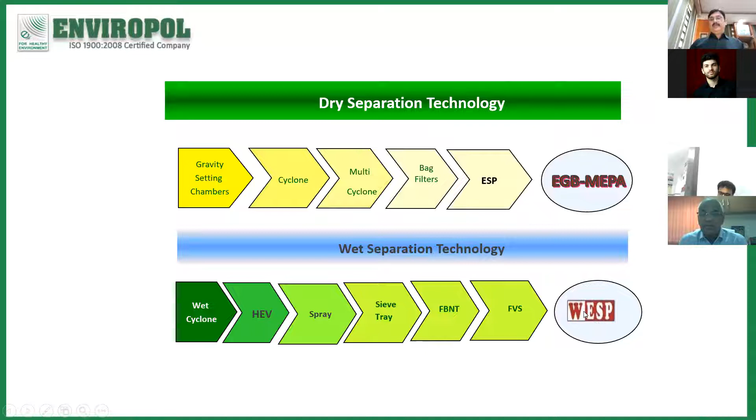Now, as you know, ESP, bag filter, and wet scrubbers are the most common technologies available in the industry. Every industry will have a different kind of setup - some industries are dominated with ESPs, some with bag filters or wet scrubbers, or it's a mix of either one.

So presently, if you look at on an average basis, you find that ESPs are delivering to the tune of 80 to 150 milligram, the current old ESPs, with 2 to 4 fields in configuration, either 2, 3, or 4 electric fields. Whereas bag filters are operated on an average from 50 to 80 milligram with an air to cloth ratio of 0.5 to 2.

It depends on the type of dust. If the dust emissions are very high in quantity and very fine, as well as very sticky, then the ACR of 0.5 to 0.6 is taken, like normally in EFB fired boiler or spent wash fired incineration.

Or for normal cases of coal, it goes from 1.2 to 1.5 or up to 2, depending on the efficiency requirements. The wet scrubber is the most versatile equipment available in industries, and it can be operated easily at 100 to 150 with the older designs. Though new designs are available which can give you even below 50 milligram, but normally 100 to 150 is common for these three types of wet scrubbers in the industry.

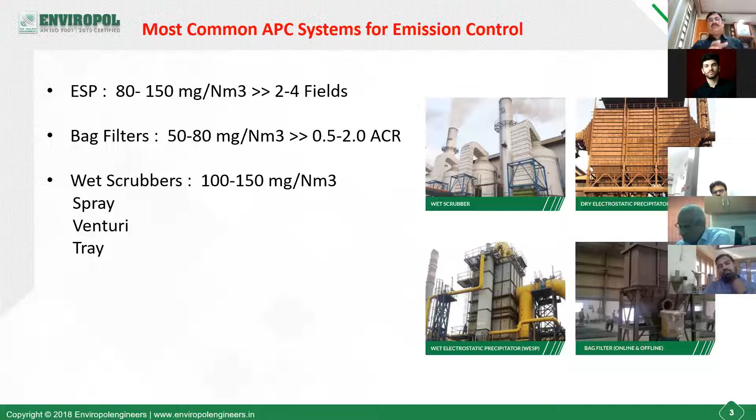So having known these three prevailing technologies, the most common technology in the industry, and knowing their limitations and the present operating conditions varying from 50 to 150 milligram, correct?

Now, if we look at the norms, which are getting more and more stringent, you find that earlier the norms were 150, and now 150 is reduced to 50, and for new plants, it is going down to 30. That means with the existing system in place, we either need a further reduction of 67% coming down from 150 to 50, or 80% for the new plant coming down from 150 to 30.

So the efficiency of the equipment has to go up by the equal amount. It has to go up by either 67% or 80% for most of the plants.

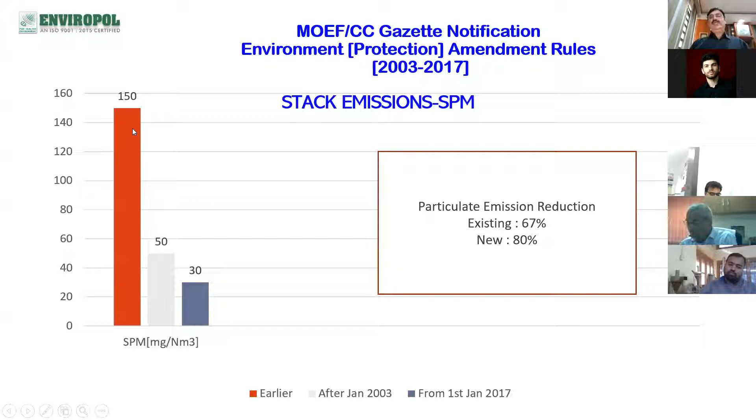The 50 milligram limit is after January 2003, and for new plants, it has already come down to 30 milligram. So the 30 milligram units, if being operated at 150 or designed at 150, you need to enhance the efficiency by almost 80% plus from the existing limits.

So what are the different configurations available for upgradation? Today's webinar is going to equip you with the conceptual ideas of how to upgrade your existing equipment. Then depending on the site to site, project to project, or equipment to equipment specifics, the fine tuning can be done.

But if you look at the concept, the most common way of upgrading an existing ESP is just to add another field. If your ESP has 2 fields, you add 1 field or maybe 2 more fields, and try to upgrade the efficiency of the existing ESP in an industry. This is a very normal and conventional way of upgrading the equipment.

Another way of upgrading the equipment to reduce emissions: the first methodology can bring you down to below 50. Coming down below 30 would be difficult with this configuration if your particle size distribution constitutes more than 10% of particles below 5 micron. Then even if you add 3 or 4 fields, nothing is going to happen if the constituents are below 5 microns, because ESP has got a limitation in arresting particles below 5 micron in the dry electrostatic precipitator.

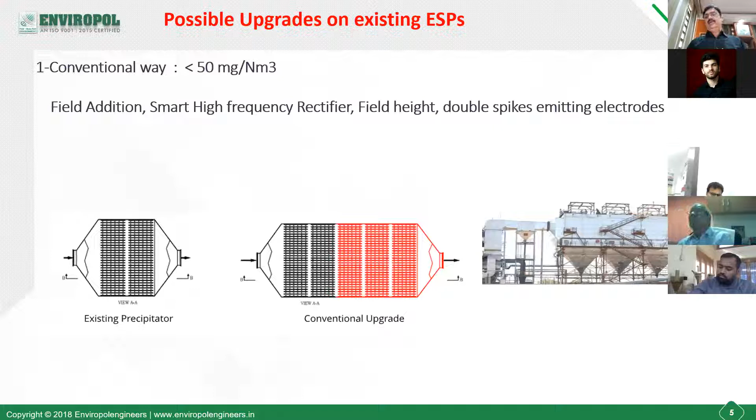So if you want to come down to 30 milligram, then another alternative for upgradation is to make it hybrid. That means the last 1 or 2 fields of the ESP can be converted into a bag filter, fabric bag filter. So this is another arrangement which can work, but it comes with a caution. The caution is that this should not be considered for those types of ash which have a high sticky, hygroscopic nature of dust.

Because what happens after the ESP, you are left with particles which are below 10 microns, and most of the particles are below 5 microns. So when the bag filter is operated only with fines, there is a cake formation on the bag filter which is too difficult to dislodge by purging air. If it is mixed with heavier particles along with fines, then the cake removal is easier. So such hybrid configurations do not give proper results if the gas particles are very sticky and hygroscopic, containing a lot of alkalis.

So this is a caution when you think of upgrading your existing ESP with this model.

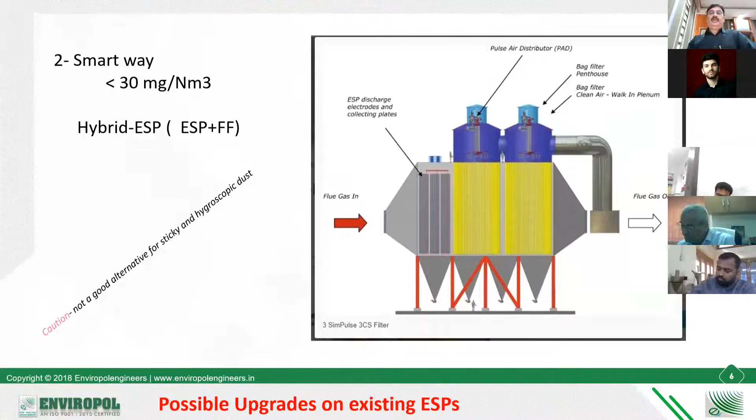The most advanced and innovative way, what we call the most innovative way of upgrading your ESP, is putting up the EGB at the outlet. You have a 2-field ESP attached with an EGB. EGB is an electrified gravel bed precipitator. Since this is a new concept for the Indian market, I'll take some time to explain it. The most effective way of upgrading an ESP is to convert it into a MEPA, which is an integration of ESP with EGB.

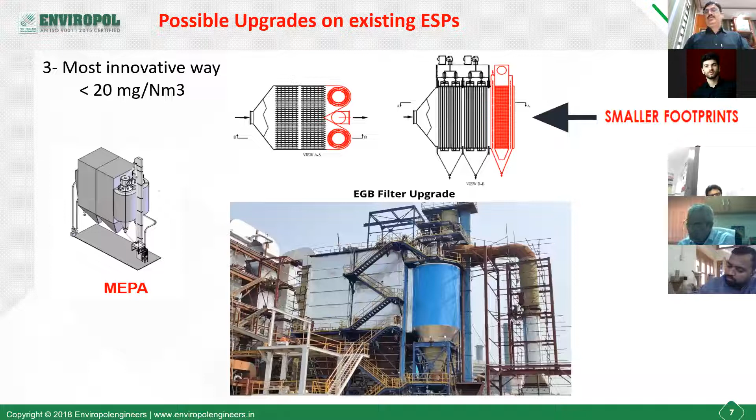EGB is also a type of ESP, but it works on the reverse principle of ESP. It is a dry system. Here the gravels are used as the collecting plate or collecting surface area. This is most suitable for high resistivity dust which cannot pass current. They use only voltage for getting polarized. So this is the concept of EGB.

In the EGB, there is a vessel, and that vessel consists of a gravel bed. The gravel is a normal gravel, pea gravel, which you find across rivers. This gravel bed has a high thickness, to the tune of 300 to 500 mm. The gravel size varies depending on the efficiency requirement, from 3 mm to 8 mm, 10 mm. And the gravel bed is embedded with discharge electrodes, which are given a high voltage to the tune of 15 kV to 30 kV.

So what happens is, when high voltage is given to the gravel bed, being a non-conductor of electricity, it cannot pass any current, but it gets polarized. It gets a static charge; half the gravel gets positive and half gets negative. It is a balanced charge. And these gravels are moving from top to bottom at a very, very slow speed.

When the gas carrying negative charge from the ESP, particles below 5 micron or below 10 micron, pass through this gravel bed, they stick to the positive side of the gravel and get separated. Clean gas goes upward to the chimney, and these gravels are taken out.

This is how the gravel bed is maintained, and it is slipping down to the bottom slowly and gradually. You can see this video - it's coming down at a very, very slow speed, and gas is passing through this.

So there are two types of separation: one is the mechanical separation because of the gravel bed, and the second is electrostatic separation because of the gravels getting polarized and having a positive charge.

If you look at the efficiency curve, you find that even for particles below 2 microns, when the electricity is on, you have an efficiency of 100%. Up to 2 micron you have an efficiency of 90% without electricity; when the electricity is on, you touch 100%. Even at smaller particle sizes, you have a very high efficiency - at 1 micron, you have an efficiency of almost 99%.

So this is a very good fit for ESP upgradation, whenever you are looking to increase the efficiency of the ESP and reduce emissions to well below 30 milligrams. This could act as a very good polishing filter for removal of very fine dust left by the ESP.

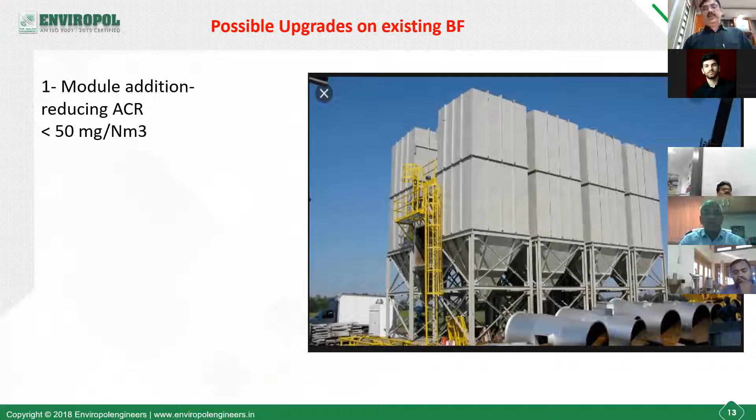What are the smarter ways of doing it? Another way is changing the type of bag. If you have normal bags, you change them to PTFE or other types of bags which have low porosity and better filtration. So the other methodology is changing the bag while keeping the same housing, but using a better bag with more efficiency.

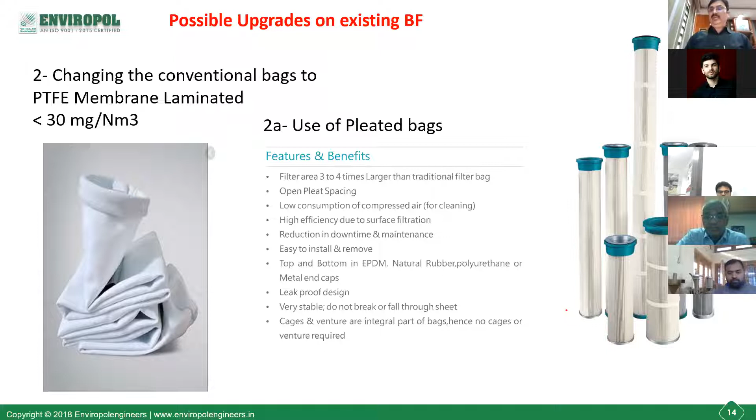The 4th method, which I'm going to explain, has not yet been tried in India, but it is a very good method that has been tried outside India: converting the bag filter into an electro-fabric bag filter. Here, you install a pre-charger to negatively charge the particles coming from the source, and then allow agglomeration of the particles on the surface of the bags because of this electrostatic charge. This is called an electro-fabric bag filter, meaning the concept of ESP and bag filter is integrated here.

So this is a smart way of doing it. The technology in India is not yet there, but we are trying to have some collaboration very soon for upgrading and increasing the efficiency of bag filters down to below 20 milligrams in the near future.

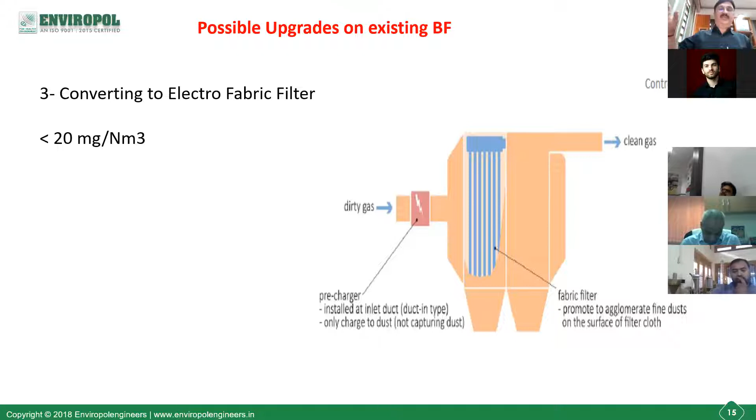So we have covered ESP and its upgrading methodology. We have covered 4 methods of ESP upgradation, and 4 methods of bag filter upgradation. Now coming to the scrubbers, I'm sure most of you must be having scrubbers in your plant.

Especially the sugar sector and other biomass sectors have a lot of scrubbers. So friends, can you be a little more energetic, and share the type of system which is available in your premises? Just within 30 seconds, please write your type of system, so that I can connect what type of systems are more common within this audience, and focus more on that particularly.

Okay, scrubber, ESP plus EGV. Okay, Venturi scrubber, then ESP. Yes, please put your answers. We are 66 on this platform. Bag filter, ESP. Okay, bag filters, ESP, wet scrubbers, bag filter. Okay, thank you so much. I think we have a mix of ESP, bag filter, and wet scrubbers. The audience is divided. I think many of you have ESPs as well as bag filters and wet scrubbers. So all are equally placed.

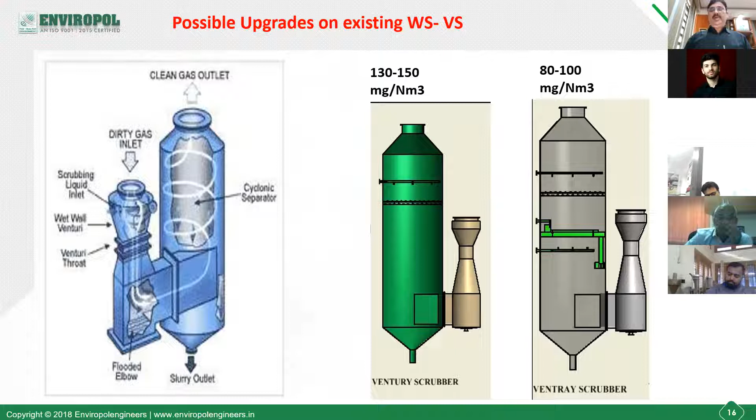So this is how you can upgrade your Venturi scrubbers. Now coming to the second type of scrubber, which is very common in the industry, is a tray scrubber.

So upgrading the tray scrubber is very easy, because tray scrubbers are known for the best upgradability for meeting future norms. The upgradability is: if you have one tray, put two trays; if you have two trays, put three trays. At the cost of pressure drop, of course, each tray will add about 50 to 60 mm water column extra pressure drop, but it gives you much higher efficiency. Whatever particles are left out in the bottom tray goes to the second tray, and the second tray goes to the third tray.

Here the design of the tray is becoming very crucial. Normally what people do is just add another tray of the same size and same configuration on the second stage or third stage, which is not right. The second stage and third stage tray has to be designed in a different way.

It will have a lower perforation gradually. If your perforation size is 8 mm at the bottom, the second one will be different, and the third one will be still finer. The open area ratio will also differ from plate to plate, so this needs proper engineering. But if you do the proper engineering, it can easily give you below 40-50 milligram, and the pressure drop with a three tray configuration will be only around 180 to 200.

That means whosoever has a tray scrubber can think of this option of upgrading from a single tray to a multi-stage tray, depending on the efficiency requirements.

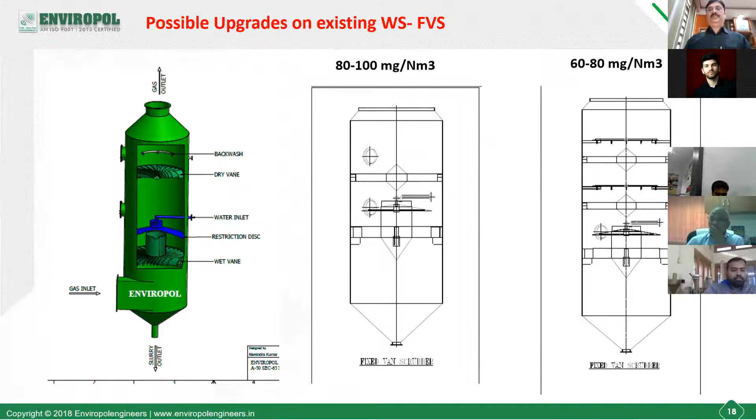Another type of scrubber which is not so common in India, but used in the African continent and many other places, is the low pressure drop scrubber. This is the most trouble-free scrubber in the scrubber design. The only thing is that it uses a lot of nozzles, but the pressure drop is very, very low.

So this is called a cyclonic scrubber. You have a cyclonic type of connection, and in this wrapped cyclone duct, many nozzles are put at every cross section of the duct to create a curtain. The gas passes at high speed through 3 or 4 stages of water curtain, followed by separation of mist through a whirling or centrifugal motion of the gases.

So this cyclonic scrubber is normally used in developing or underdeveloped countries where the norms are up to 200 milligram. So 150 to 200 milligram is the normal outlet emission from this. It's quite popular in Vietnam and many other areas like the Philippines, Vietnam, and Tanzania. This is very much popular.

Now, how to upgrade this cyclonic scrubber? You can convert it into a CV scrubber, called a cyclonic vane scrubber. So whatever you collect from the cyclonic action and duct configuration, you add one vane and create a wet wall on the surface. You can go below 80, near 80 to 100 milligram, from this configuration.

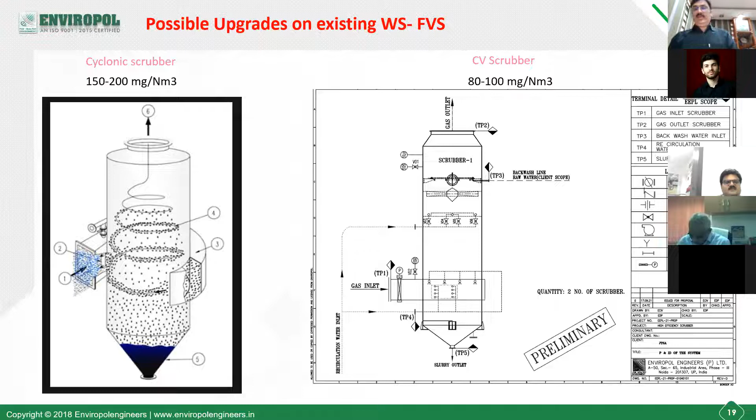Then in the bag filter, we discussed 4 types of convergence or upgradability. And now in the scrubber, we have discussed 4 types of scrubbers, and each scrubber has 1 or 2 types of upgradability propositions, right? So let me go forward.

Another way of reducing particulate emissions to below 10, 20, or 30 milligrams, the topmost upgrade of scrubbers available, is to convert them into a wet electrostatic precipitator. So the bottom portion remains the scrubber, and on top we just insert the wet ESP module, which contains collecting pipes, electrodes, discharge electrode, insulators, and the TR set.

So you can easily convert your existing scrubber into a wet ESP. There is no need of extra space. You can just build in vertically. There is no need of changing the duct or replacing or repositioning the ID fan and chimney. Unlike a normal ESP, whenever people replace scrubbers with a dry ESP, they have to shift everything away from the boiler, like chimney and ID fan. But here, when you convert it into a wet ESP, you don't have to shift the layout of the boiler.

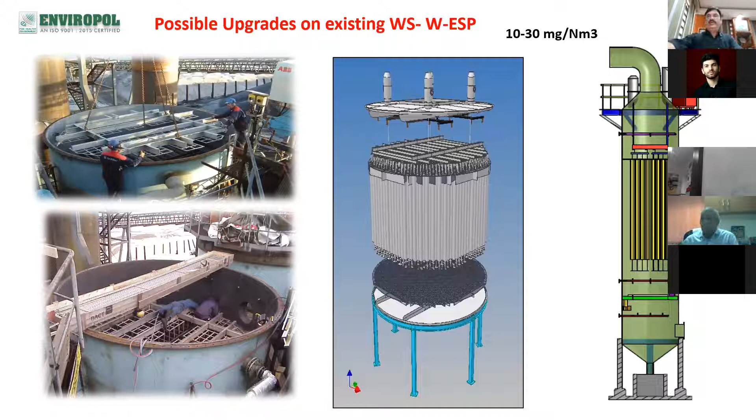So let me give you a little brief about the wet ESP. It is nothing but a normal dry electrostatic precipitation concept, but the first step and the last step are different, that's all. The first step is that the gas has to be saturated, unlike a normal ESP. The wet ESP works on saturated gas. When the gas is wet, with a high percentage of moisture, the wet ESP performance increases multifold, because then the resistivity of the particles does not matter much. The water film over the particles creates the charge, and water being a good conductor of electricity, the charging is very, very fast.

If your dry ESP takes 80 kV, for the same efficiency, the wet electrostatic precipitator takes only 30 kV. So this is the difference in charging. It has a very high efficiency, it can go up to 99.99% and can lead to below 10 milligrams. In many cases, we have seen it running.

So the first step is gas conditioning, and this is done in the scrubbing zone, which is already available if you are upgrading a scrubber. Then corona and charging is same. The discharge electrode has a negative charge and gives it to the particles. The collecting plates here are a pipe or hexagonal tubes of collecting surface. It is grounded and given a positive charge, and then migration and precipitation is same as normal ESP. Then particles are removed by flushing the electrode instead of rapping. So this is the difference as compared to a normal ESP.

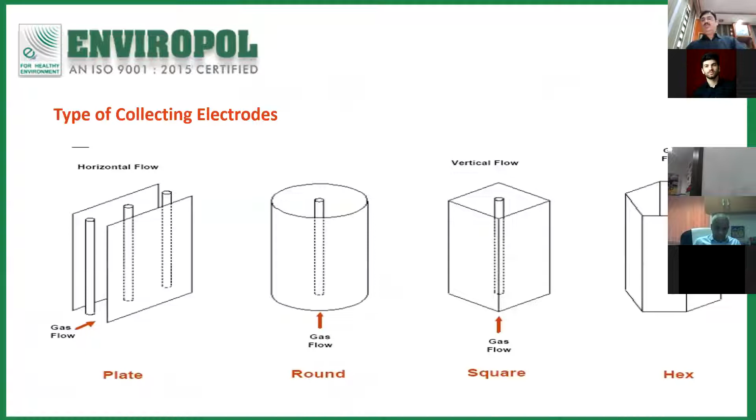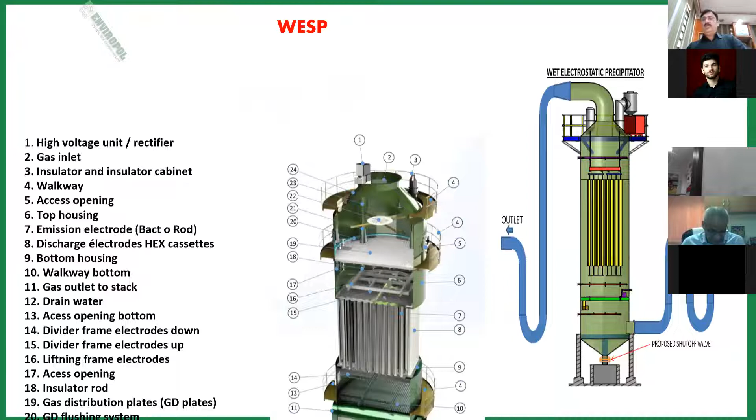In the bottom portion, you have a tray scrubber followed by the wet ESP, and this can easily give you below 10-30 milligrams, whatever the efficiency requirement or outlet emissions requirement is. We have a Swedish collaboration for this technology, and we have already supplied 7 systems, with 2 more under installation in various industries, including sugar, steel, aluminum, and zinc smelter plants. So we now have 7 installations working in India with the Swedish collaboration.

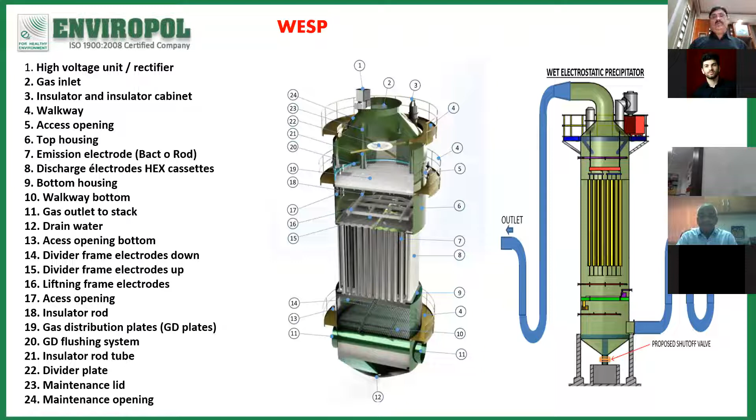If you look at the versatile nature of APC across the type of system, you find that wet ESP is the most versatile equipment, which takes care of solid particulate matter. It also takes care of gaseous pollutant to a great extent. Whatever gaseous pollutant can be condensed at a dew point, this separates, the mist gets charged, and aerosols are removed with the effluent. So this is a broad comparison, and you find that wet ESP has all the tick marks.

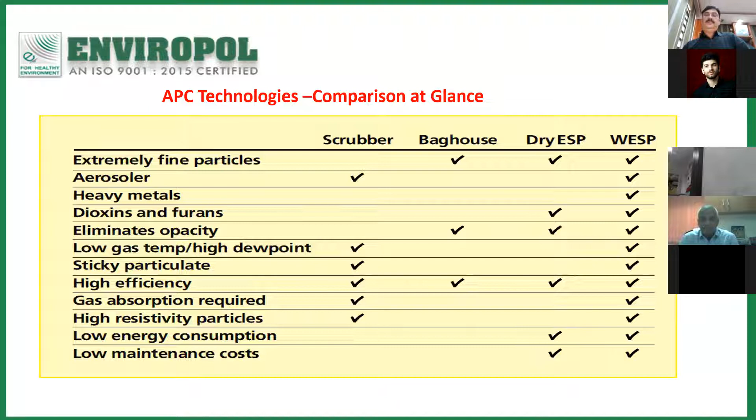Now, having gone through the various types of concepts which can be applied depending on the industry and the existing type of APC, we should know where we are heading in future. The time will come very soon when we will have to compete with European standards on emission levels. The European standard on emission is based on BAT, best available technology. And based on BAT, these are the standards displayed on the screen. You find that PM is in the range of 2 to 5 milligrams only, whereas we are talking of 30 here today. Maybe 10 years down the line, with the type of commitment our nation has given to be net carbon emission free, or zero, by 2070, we will have to follow these European standards on emissions.

And if you look at SOx, NOx, and mercury heavy metals, what should we do as an industry on environment? So friends, after this we will be talking about our future as an industry on emission control or pollution control. I'll give you a couple of hybrid technologies which can be explored to even meet these pollution norms of European standards.

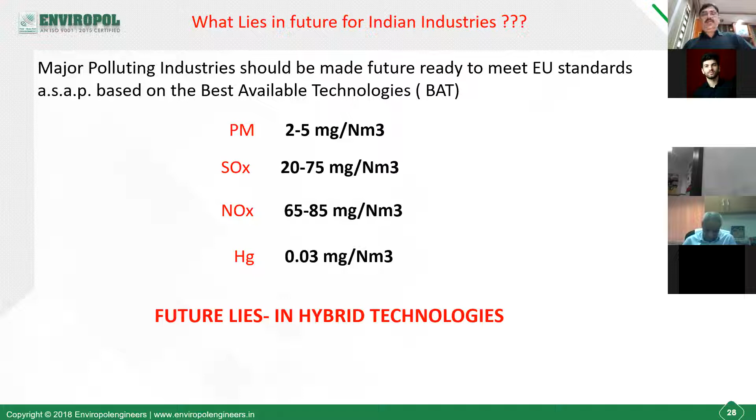So let us talk of our future now. On the screen, you see that there are 4 types of hybrid technologies which have got good potential for the Indian market. The first hybrid technology is a revenue generating technology for the biomass industry, where the biomass dryer is attached with a wet ESP. This model is revenue generating.

You save the fuel, you dry the fuel by direct mixing of the flue gases with the fuel in this flash tube. During this travel, your ash particles, unburnt or partially burnt particles, get captured with the biomass, and the biomass is separated after drying and goes back to the boiler furnace. The partially clean gas, when I say partially, I'm talking 90% clean gas, comes to the wet ESP, and then it is further cleaned and goes to the stack.

This model has been awarded recently by CII as the most innovative product of 2021 on national level. We have got it patented, and we are now exploring this model to be used in sugar industry as well as in paper industry. One installation is already commissioned and running well for about 2 years, and we have done all sorts of testing and found this revenue generating model a way forward for converting air pollution control into revenue generation for industries like sugar, paper, or any other biomass based power plant to reduce emissions to even below 30 milligrams per normal cubic meter.

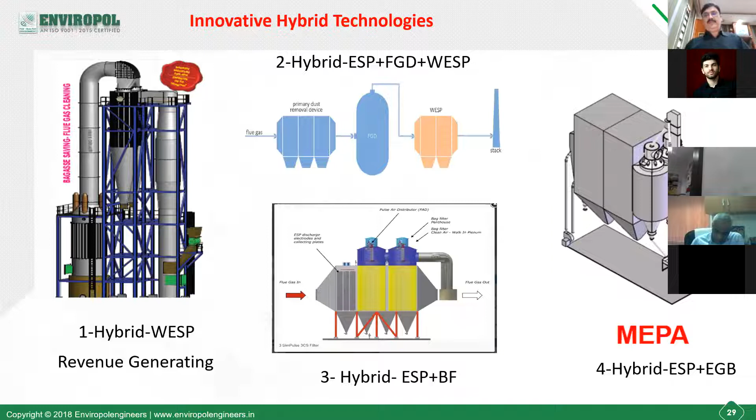So the two most promising technologies we have learned today are wet ESP and EGB. In the wet spectrum, the wet ESP is the most advanced. In the dry spectrum, electrified gravel bed precipitator is the most advanced technology.

So we will have to study these technologies for adaptability in your respective plant and find out if we can target achieving below 30-20 milligrams by adding these equipments in the existing APC devices, or whether you are capable of doing it only by upgrading your existing equipment by other methodology which I explained to you. So the call is yours.

We can study wherever you approach us, and we will find out what is the best way of doing it. But before you go ahead with the upgradation, our suggestion would be to study all these concepts, rule out one by one, and then go with the final one. Instead of going directly with one or two suppliers' recommendations, you should not do that. Engage with a proper study, and the proper study would need some inputs.

The inputs are: what is your existing system's collection efficiency, and at what size of particles. That is very, very important. When we talk of efficiency, we just talk plain efficiency without attaching it to the respective particle sizing. So if your collection efficiency of ESP is 99%, but it is leaving all the 5 micron particles, it is not going to serve your purpose in future times, because even if you have 10% or 5% particles below 5 microns, it is not going to meet the emission norms of below 10 milligram or 20 milligram.

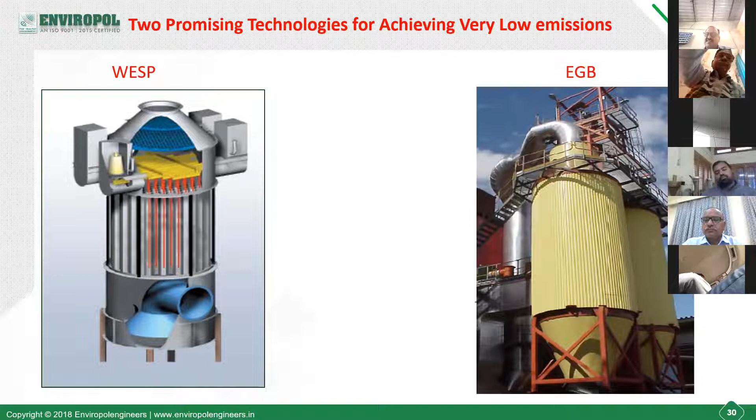I think I've explained both concepts, and both are capable of giving you below 5 milligrams if designed for that purpose. The wet ESP is equally capable of reducing to 5 milligram per NM3. Similarly, the EGB can also give you below 5 milligram. Believe me, I have seen both systems running in Sweden at 3 milligram per NM3 - EGB on a wood-fired boiler, and wet ESP on a chemical incineration. So it has good potential.

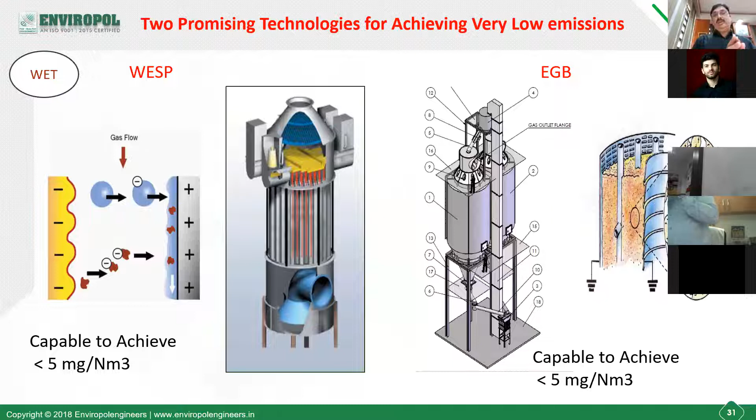The only thing is at what level we are looking to operate in India at the moment - whether we are only trying to fulfill the requirement of CPCB, or we want to be future secure and also see our social responsibility to cut down emissions, not only particulate but also gaseous pollutants. The ball is in your court, and it is our duty to keep you appraised about these new technologies. The call has to be taken finally by the industry owners, depending on their social connect as well as their motive for becoming future ready.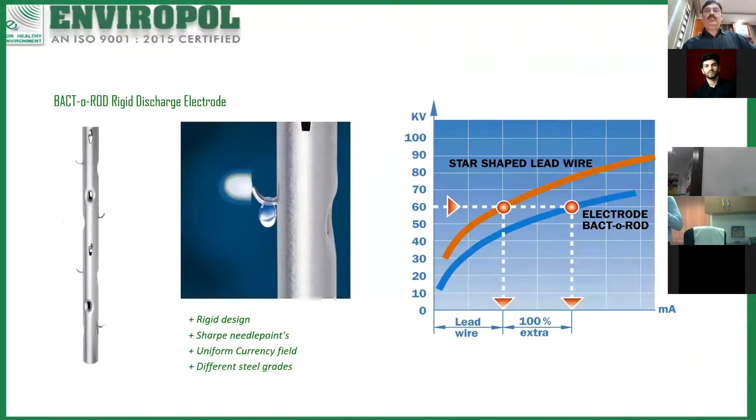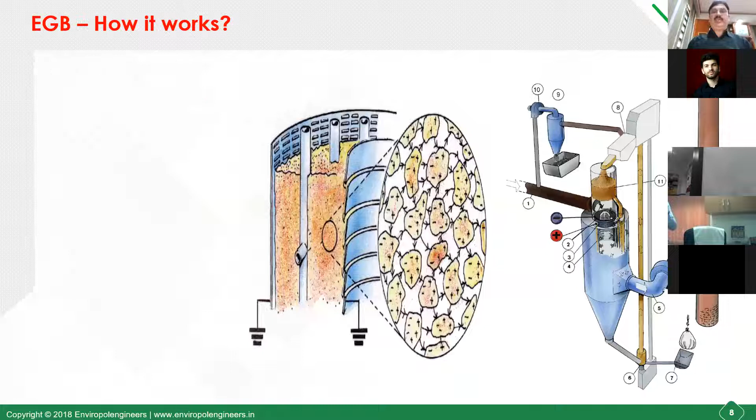Yes, to all my friends who have put up the question on the chat box about how it works, let me just explain you how it works. As I said, EGB is a vertical type of electrostatic precipitator.

Here, gravels are used as a collecting surface. In a normal ESP, you have collecting plates which are grounded and having a positive charge. Your particles are having a negative charge, and they get migrated and collected on the collecting plates. Then rappers are used for dislodging, and the ash is removed and clean gas goes out.

Unlike that, here the gravel surface is polarized. Polarized means you give voltage and it becomes balanced charged - half of the gravel surface is positive and half is negative. When the negatively charged particles come in contact with this gravel bed, they get stick to the positive side of the gravel because of this polarization.

It is just like the principle when you rub a plastic rod on your hand and find that a charge is there - it's in a similar way. A very mild charge is on the gravels, and when negatively charged particles come, they get stick to it and form a layer on the gravel.

And these gravels are not stationary - they are moving from top to bottom at a very, very slow speed. The gravel takes about 7 hours moving from here to here, meaning the same gravel is there in the system for 7 hours. So the speed is very, very low.

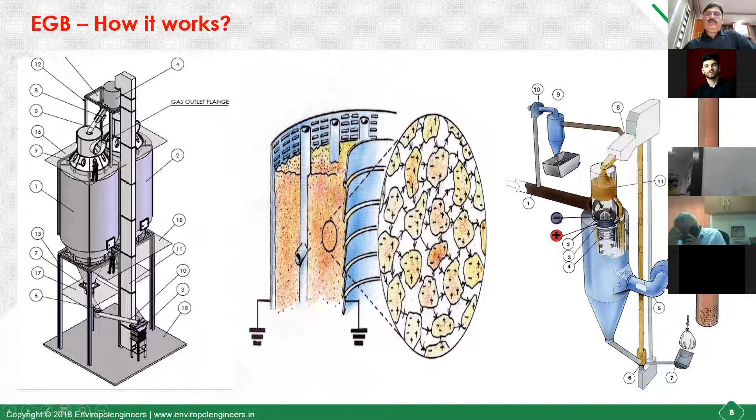This is the internal view. What you see here is the electrode case, the emitting electrode case, which is embedded into the gravel. And this is hung on 8 insulators, which are connected to the TR set on top.

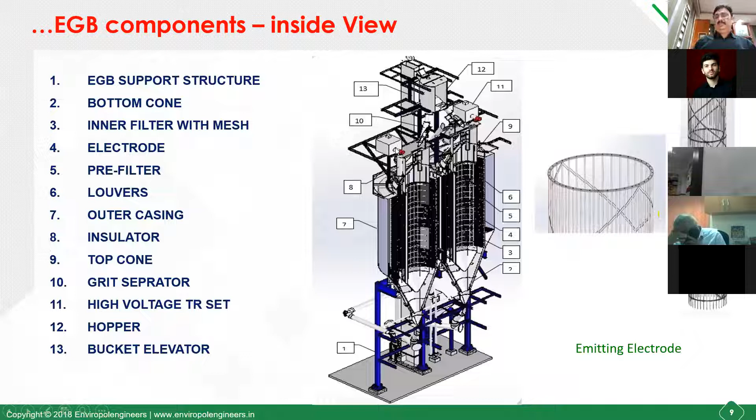And this is how it works. The gravels are coming down slowly and gradually, and gas is passing through this at 90 degrees.

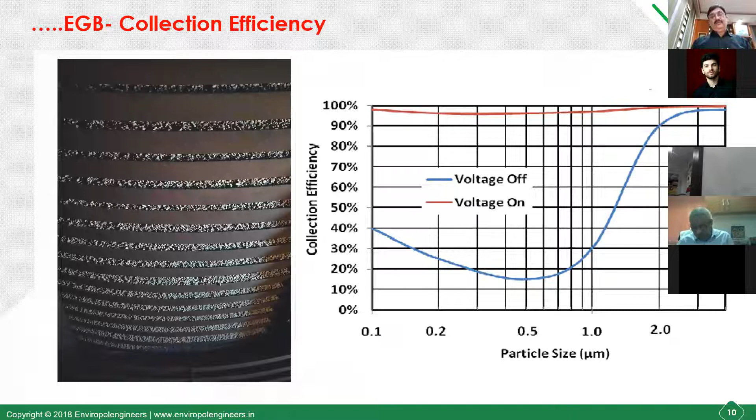And this is the gravel coming out.

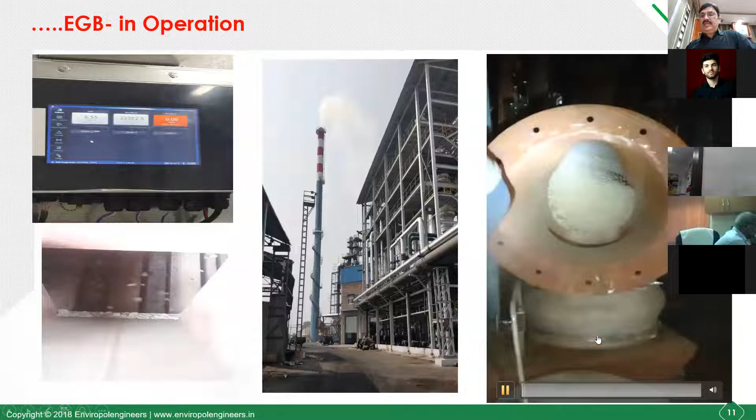This installation is on a spent wash fired boiler in DCM. Spent wash, as many of you sugar professionals must know, is the most dangerous fuel for boilers. It has high potassium, 40% of particles are below 10 micron, and the dust loading quantity is about 30 grams. The dust is very sticky and hygroscopic in nature.

So all negatives are there in this particular fuel, and we have successfully installed EGB on this, the worst kind of fuel and worst kind of application if you look at it from the application point of view. This has worked very successfully under these tough conditions. So I am sure on other fuels we are talking about, this is going to be a cakewalk, and it will give you very, very low emissions at the outlet.

And this is the gravel cleaner. You have an air pressure, and then various pipes so that the gravels go from one stage to another to another, getting cleaned with mechanical force and pneumatic force.

During startup, we even achieved 6 milligrams, though the boiler was being operated at a low load. We crossed and touched 6 milligrams at one point of time from this installation.

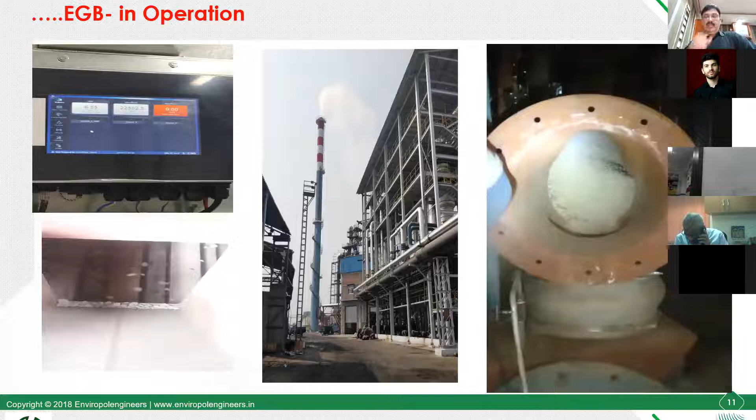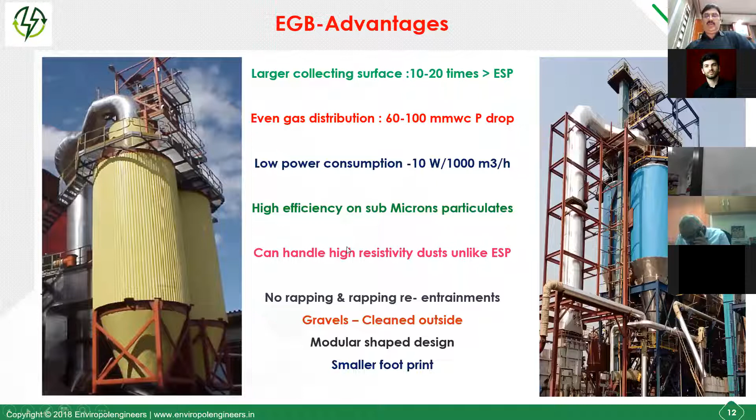So I hope this EGB is now relatively more clear, and these are the advantages. If you still have something to ask, you can put your questions in the Q&A box after a few minutes when I take up the question and answer.